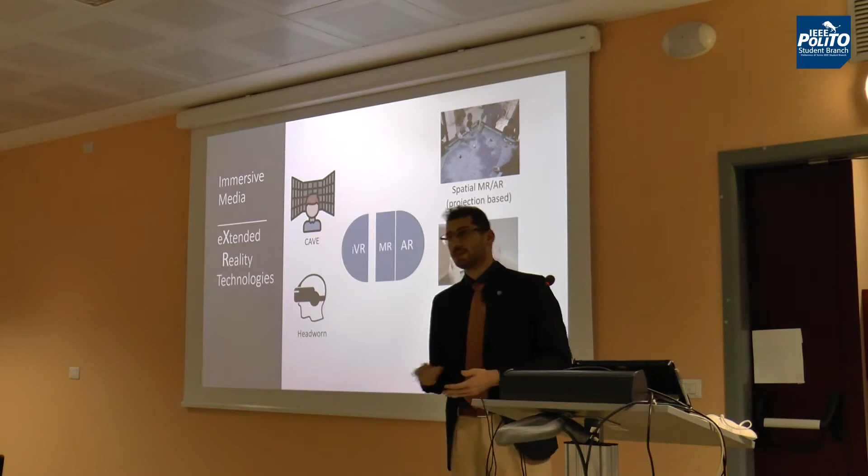I will mostly focus on virtual reality in that speech, so I will give a bit of a dive into a list of what can be done with the headsets.

I don't know if any of you have experienced virtual reality by yourself, and for those of you who have not, I usually use that quote, because talking about VR is really like dancing about architecture. You cannot have an idea of what it means to be fully immersed, to have your senses fully deceived by a simulated environment if you have not tried yet.

So if some of you is interested, we are always welcome to get participants for our study on the other side of the building.

But of course, not all the headsets are made equal, and we can have a cheaper and more affordable headset with lower capabilities, and on the other side of the spectrum, the opposite. Usually we set the bar for what is acceptable for a true immersive VR experience there.

So to have at least a headset which is capable of allowing the user not only to move your head around, but also to wander in the real world, ergo the virtual environment, and have your hands tracked in some way, either by using conventional controllers or more sophisticated tracking technology.

And by doing so, of course, you can build a lot of different experiences, not only pertaining to training, but we will focus on that. And why is it important to have also other stuff?

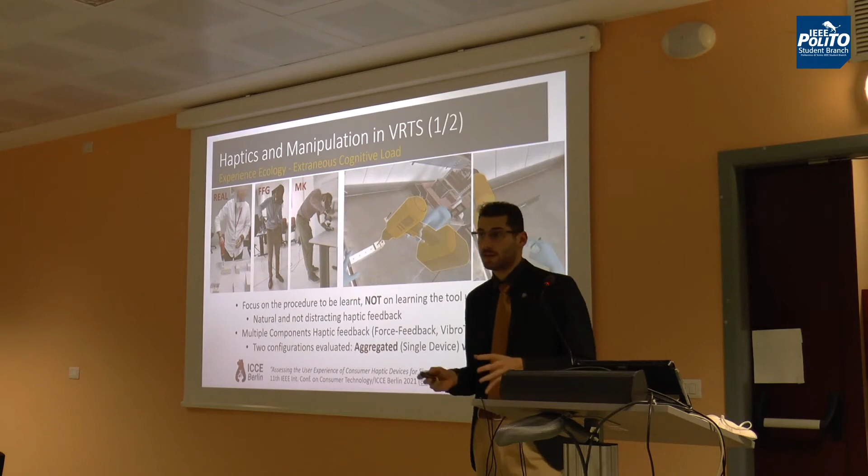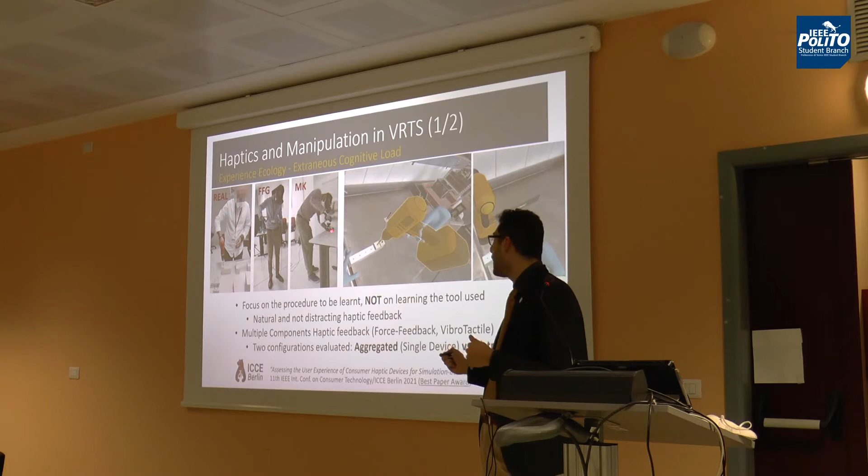One configuration brings just a single exoskeleton-based force feedback glove, so both feedbacks in a single device, and another one in which we distributed the feedback on two devices: a much cheaper glove with just vibrotactile feedback, and then a 3D printed custom mock-up to simulate the force feedback.

We studied with some people their performance, and eventually found out that overall the two configurations were mostly on par, but the force feedback glove led to a less usable and more straining experience compared to the mock-up, though it allowed users to better discern the peculiar sensations associated with the different phases of the screwing activity.

On the other hand, the mock-up provided the user with higher fidelity in terms of weight and tool shape, which reflected in superior task accuracy. There was no clear preference between the two, but as we can see, at a fraction of the cost we can have comparable performance.

The only downside is having just a custom 3D printed device, which is not a minor issue. If you think about it, we have a visor, a headset that can be reused for multiple VR applications, and then we have a device that sticks to just one. So how can we fix that?

We proposed as a proof of concept a reconfigurable approach for tangible interfaces that exploited Lego-like props to deliver tangibles that mimic the real tools. The idea was that together with the virtual reality training system we provide and ship to a company, we also provide instructions and a basic kit to build multiple experiences and adapt them to the simulation.

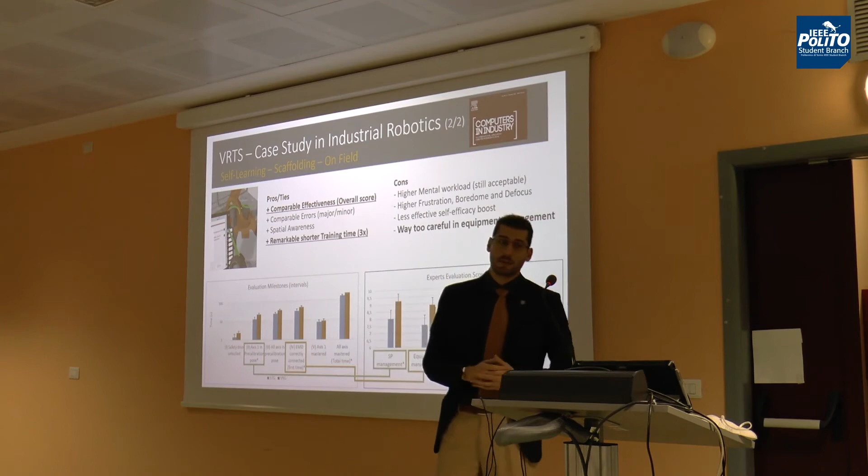But the virtual reality was able to provide that with 3 times shorter time, which is quite astonishing. Also for us it was still quite surprising to see that. Of course, there are some drawbacks - this condensed training can raise the stress level a little bit more, but still in an acceptable way. And let's say the fact that the system is not already able to adapt to the different personalities of the trainees can, for some people, be staggering.

And moving a bit deeper on that - this is the general framework of testing a virtual reality training system, but what can be done? Actually, details matter a lot. Think about, let's say, we have this plant here, the yellow and red plant, okay?

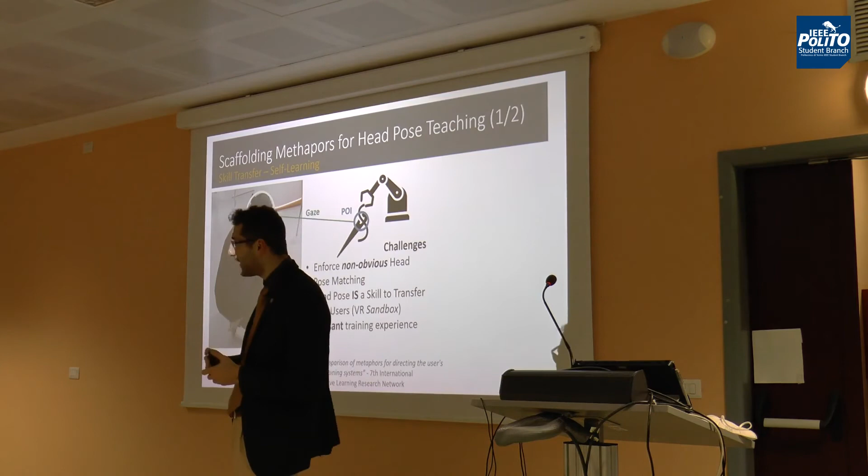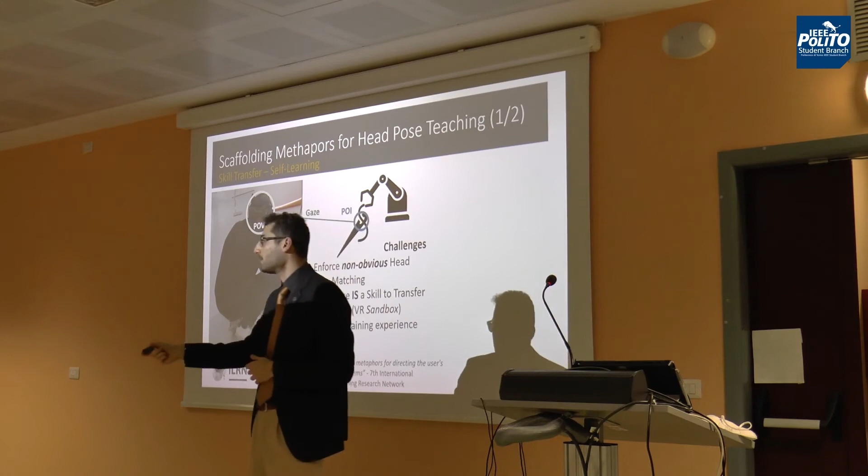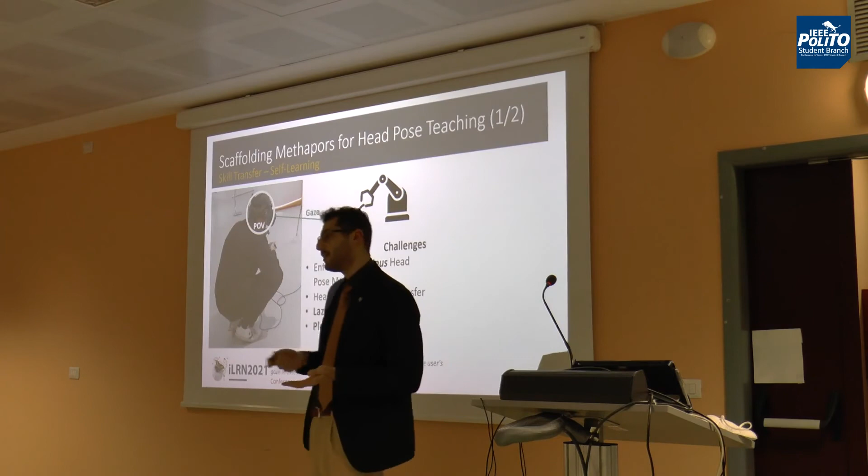And the trainer wants me to point the laser at that plant in a given way. So let's say I try to do that. But if I'm not instructed precisely, I can do that from multiple perspectives. But if this machine has a particular configuration that I want to instruct people, maybe the trainer wants me to go like that. This can seem easy, but of course you can do it with people and say 'you are in the wrong position, you are in the wrong position,' pop up error messages all over, but you will land in an unpleasant training experience.

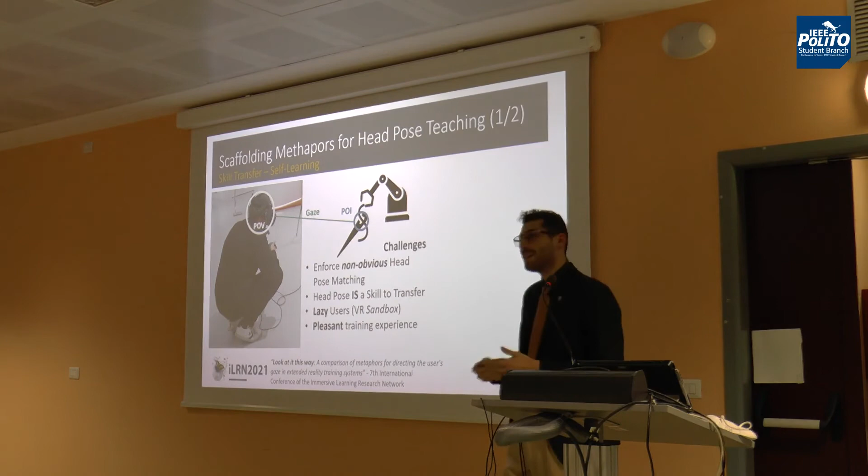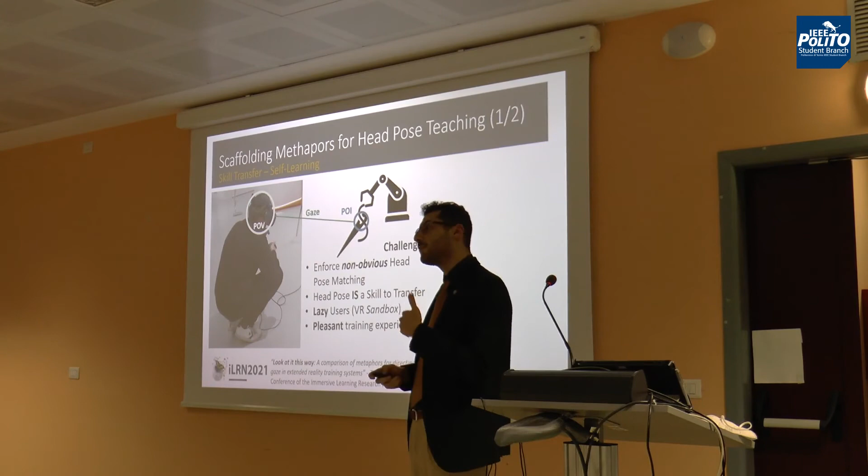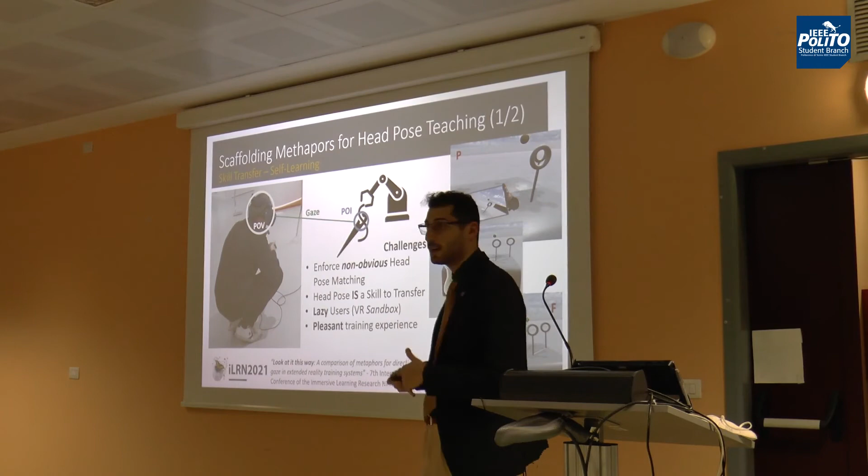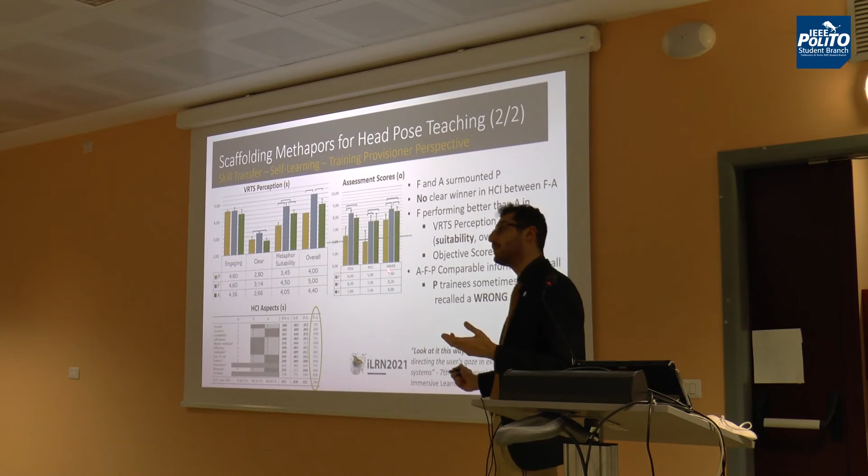This combines with the fact that in VR some users tend to behave quite lazy and are not willing to assume uncomfortable head poses without any reason. So we moved from the standard approach of using video instruction and proposed other metaphors and approaches to solve this problem - one based on an avatar and one on a full screen visualization. We eventually found that the standard solution usually provided is quite ineffective, with a quite large effect size.

So in the end, these are the kinds of considerations that experienced designers working with this technology should consider when designing. A very little decision can make a whole difference on the training effectiveness itself. So I would also like to give just a brief overview of that work.

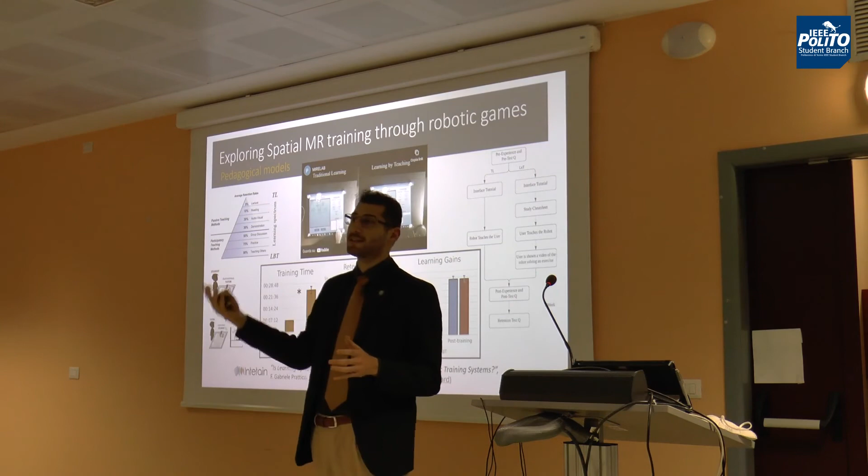Since now we have seen, let's say, the natural translation of a standard training approach, where people are scaffolded - guided step by step through the training. Each step you do, I tell you what to do next, and so on. But is that all? Is there nothing more that we can do with such fancy technology and media? Well, there is much more that we can do.

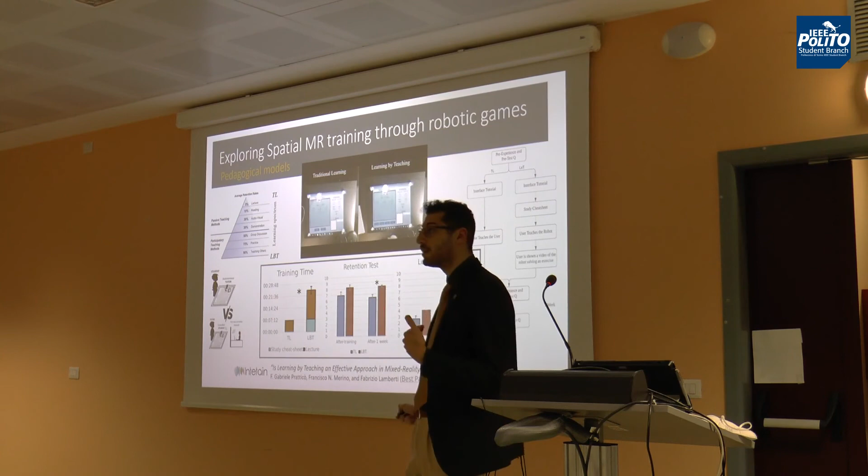There are many pedagogical models that can be exploited. So even with the same technology, almost the same experience, the way you use that as a trainer can make a lot of difference on the pupils. We found out, for instance, that a learning-by-teaching approach - using a spatial augmented reality setup with an autonomous robot that assumes the role of a peer student that you have to teach something - boosted quite significantly the effectiveness of the training, but more importantly in the long term. So the same application, the same scenario, not such a different configuration of the simulated scenario, and just by changing the way you use it we got a quite significant improvement.

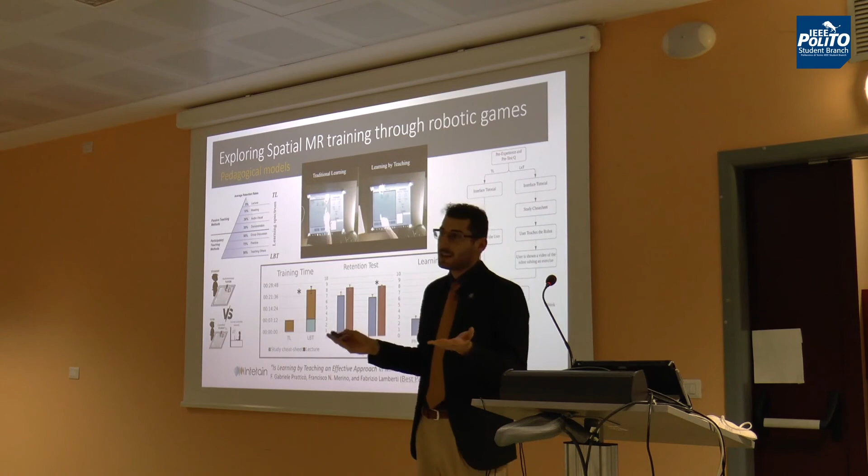This can give you an idea of what happens behind the scenes - how these are measured, how we make assumptions, and how we pass these insights to the industry and to the rest of the world.

Okay, and finally, just to conclude, briefly summarizing what we have seen: immersive media are truly promising for training and education, if any more proof needs to be done. And immersive VR technology is acceptably mature. Of course, you always want higher resolution displays, sub-millimeter tracking accuracy, and so on and so forth, but actually what we have right now is already good enough to make a wonderful experience.

So there is a need to focus on the human-machine interaction aspect and the user experience as well, and details matter a lot in that case. Little changes can make a lot of difference in the results, and of course the best is yet to come. Thank you, and this concludes.